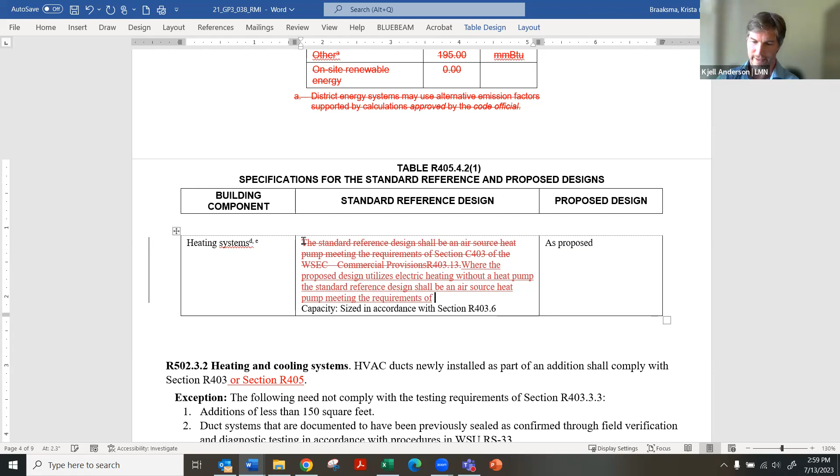Standard reference design. To use the 2018 language for the standard reference design.

Okay, we've talked about this a lot today, so I don't want to over discuss it this time because we've discussed this very thing already. But okay, is there a second for Gary's motion?

Okay, I'm not hearing a second. So the motion dies for lack of a second.

Unbelievable. I'll second. Okay, Andrea has seconded, so now we have a motion to amend, which is currently the motion on the table.

I wonder, the tag has talked about this issue before, so let's make sure our comments are new and in reference to the main motion and the amendatory motion's relationship to the main motion, because if things have changed, because now we're talking about proposal 38, then let's talk about that.

Okay, Gary, do you want to talk to your motion? No, it's pretty much there, and I know that we've debated this back and forth, so I'm perfectly fine if everybody else is to just go ahead and vote on this amendment. Like I said, I think we've debated it. I know that there's some hands up, but I'm fine with just going straight to a vote on this one.

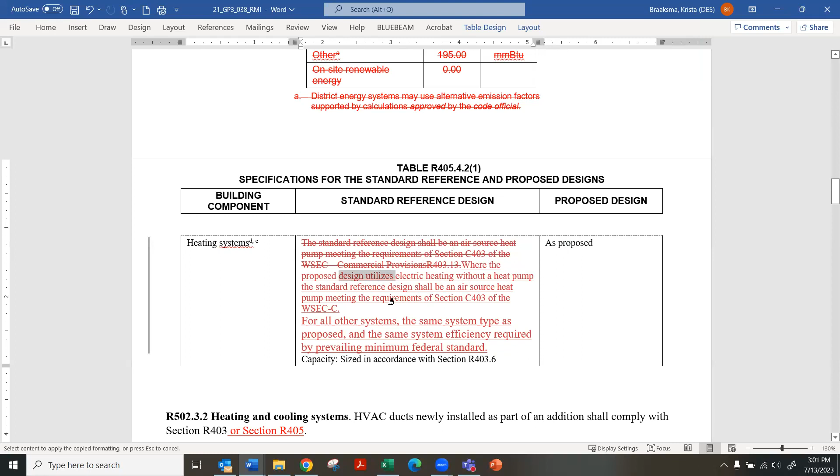Oh, okay. Yeah, I guess I would say regarding the amendment, I think that this possibly should be a change, maybe not, but I think that's exactly what David Reddy was suggesting, that we actually look at how things should be changed in the standard reference design and look at that in relation to the percent reduction targets that are in the compliance section. So I guess that's my thought. I want to consider this and other options, but I'd like to do it in relation to those targets and not do it now.

Okay, thanks, Poppy. Henry, you're up.

Yeah, just for clarity, if we are going this route, these code change proposals should be based off the 2021 as it was adopted. And that does include a heat pump water heater as the standard reference design for water heating. So if folks think we're going to reference the 2018, we need to clarify that here. It probably takes another section to revert back to 2018 language from 2021, if that's what folks are talking about. And once again, without beating a dead horse, this seems like we're just going like for like compliance here. So a gas house can achieve whatever 36% savings, and a heat pump house achieves 36% savings, but we're still stuck at the basic fundamental issue that the heat pump house still uses half the energy. But if you go through this route of modeling, we've lost that comparison that the rest of the code has been pretty strongly adopting for the last three code cycles. I might be misreading this wrong, but I just want to bring that up one last time.

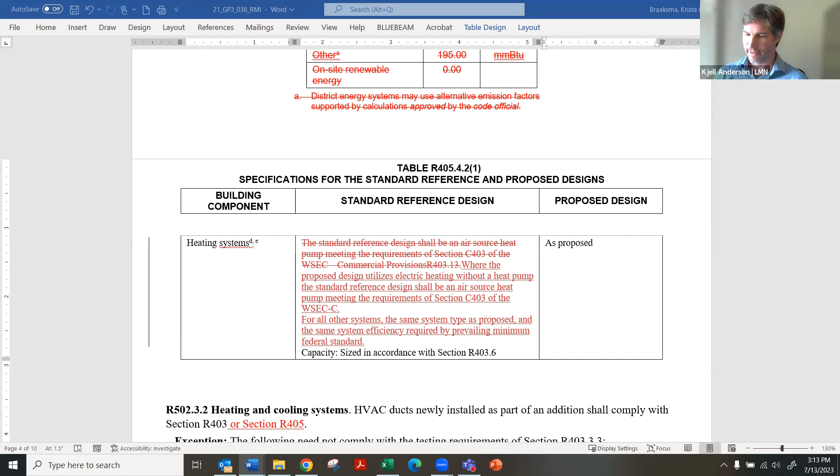I am willing to risk a voice vote on this, since I'm not seeing any hands up. The motion is to adopt, as I restated a second ago. All in favor of the motion, say aye. Aye. Aye. Aye.

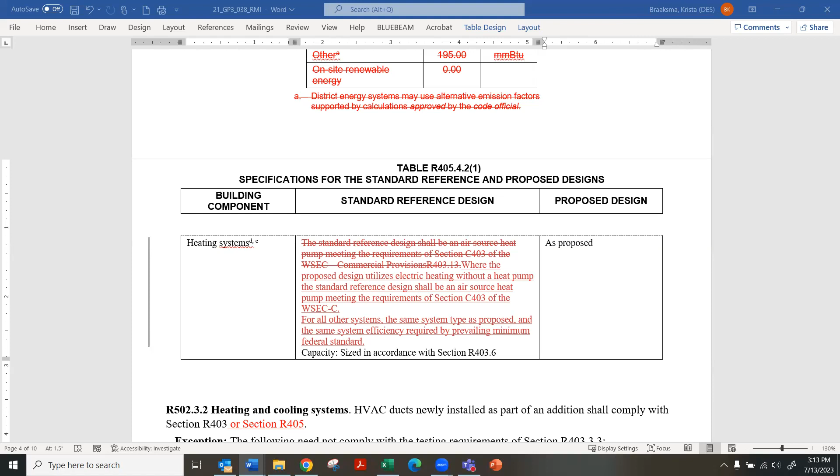Okay, those sections of 038 are moved forward. We are now discussing 039.

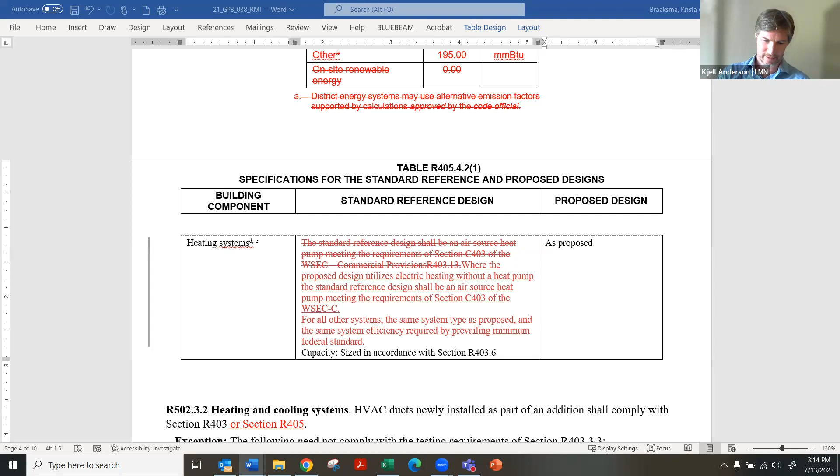Yeah, this is addressing some of the same areas we just talked about. There are two different views, site versus source, which we've discussed at length. The site-based view we just passed on Johnny's proposal is a valid view when you compare it to the federal standards, like Gary's amendment, which failed.

When you're trying to compare site-based energy without looking at federal standards, and comparing heat pumps versus gas, you're doing an apples to oranges comparison. So there's a problem, and you really need a source-based view if you're going to ignore the federal standards. I think we should look at this proposal in front of us as a parallel path, because the one just passed doesn't quite address the issues. It's close, but it doesn't quite address it. So this is attempting to look at a source-based instead of site-based path.

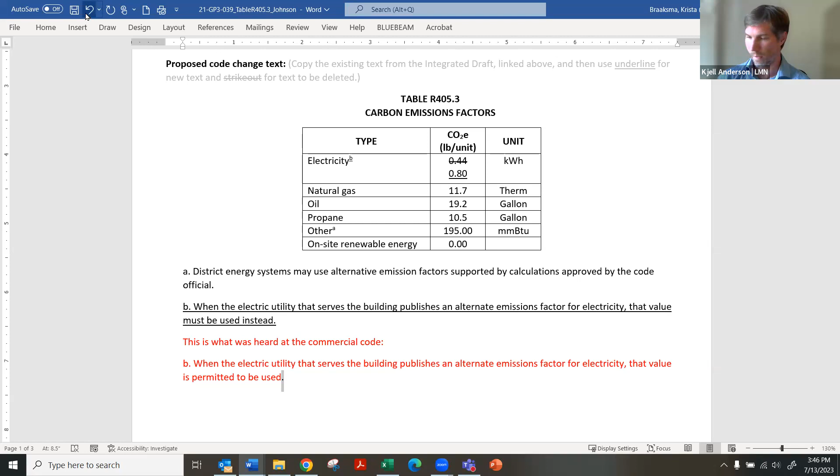Yeah, a lot of this is adjusting on the fly because we had a proposal that killed the whole emission factor table, and so we're trying to merge this. It makes it kind of hard to do on the fly. But if you want me to come up with language for the MVE committee, I'd be happy to do it - it'd be like a single sentence or so that references it. Yeah, you're more than welcome to do that kind of thing. We have 15 minutes left, 13 minutes left, and I don't think we could write that in 13 minutes and agree on it.

Okay, we have 13 minutes left. We could always extend this meeting because we're having so much fun. But let's keep our comments pithy and to the point. We do have one more proposal to consider after this, if we get there. Otherwise, the other proposal will probably just get kicked to the MVE committee to make a decision on, because I think reconvening the tag for a proposal and a half might not be the best use of all of our summers. Okay, so Andrea, you're next.

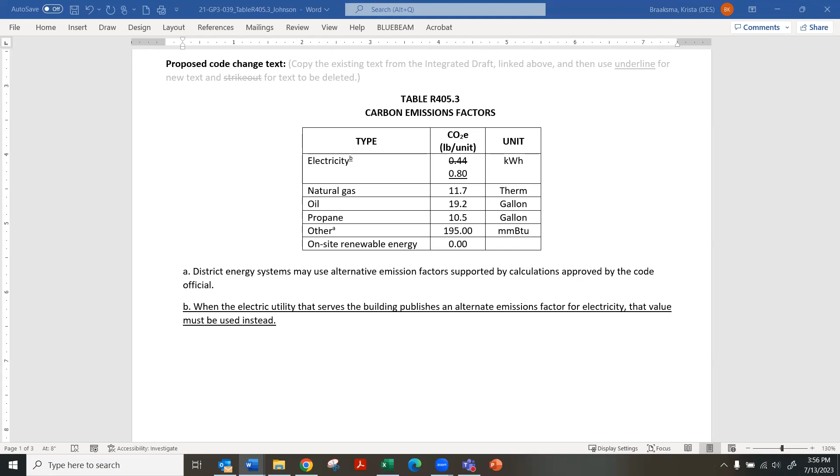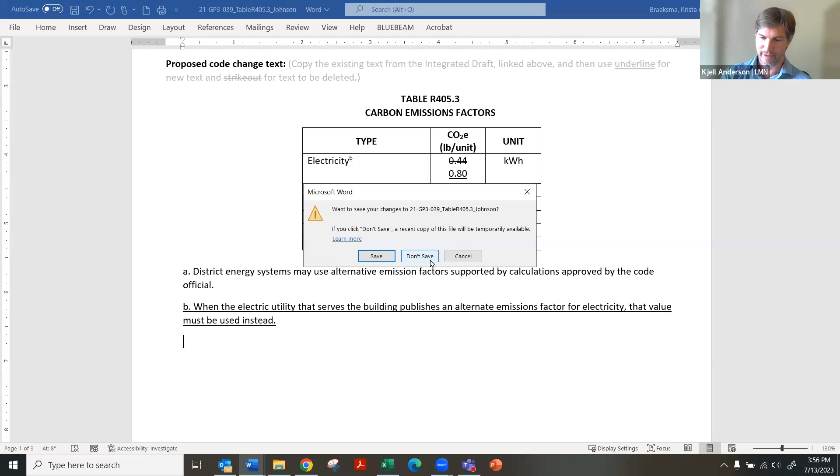Okay, motion carries. Exactly one more proposal, we have 4 minutes to consider it. My guess is we are not going to be able to finish consideration of it. So, does anybody have the heart to extend the meeting or kick it to the MVE committee? I don't want to convene the tag just to consider this one proposal. So if anybody wants to extend the meeting, I will entertain a motion to do that. Otherwise, we are going to kick it.

Albert makes a motion to extend the meeting and finish the work of the day. And that extension is for how many minutes? 30? How about 15? How about 15? I accept the friendly amendment. Okay, then I second that. Okay, we have a motion to extend the meeting by 15 minutes.

I am going to take a voice vote on this. All in favor, say aye. Aye. Aye. Any opposed, say nay. Nay. I heard one nay, that's Andrea. It's only because I can't stay past 4. Yeah, I'm really sorry that anybody has to stay past 4, including myself.

Okay, meeting is extended. Without further ado, let's consider proposal 15, which is the most exciting yet. No, I just said that to try and make you want to stay. All right, so proposal 15, we had just a tiny bit of history.

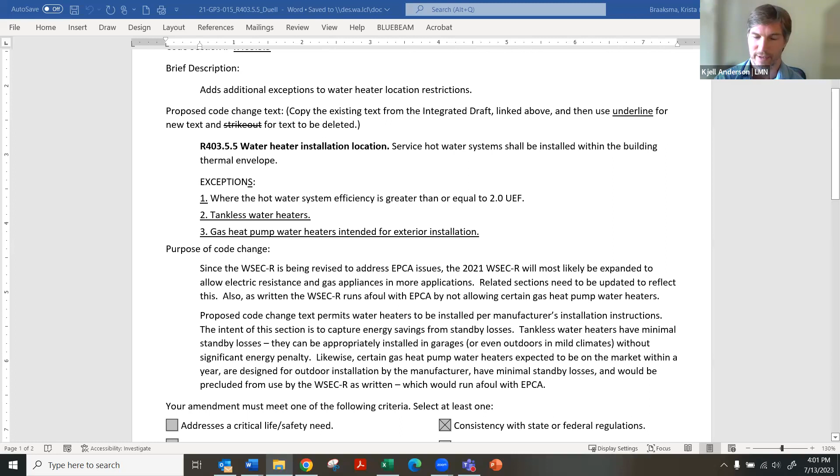Thank you, Jill. So have we now changed it in order for striving for EPCA compliance to allow federal minimum water heaters? Yes, my understanding is we passed a prescriptive thing, we've also passed a performance thing, and both of them, to the best of my understanding, allow federal minimum efficiency tankless or federal minimum efficiency gas appliances. Okay, and the reason I asked that, I haven't dug into it, but I presume that the federal minimum efficiency water heaters still include naturally aspirating water heaters. And if that's the case, we need to address that. We do not want to put naturally aspirating gas water heaters inside conditioned space. So perhaps this motion needs to be amended if that's the case. Hopefully some other folks will jump in on that, perhaps Dave or Henry.

Do we allow naturally aspirated water heaters?

Well, if that's the federal minimum, I know they're still out there. You can go to Home Depot and buy one tomorrow. So 0.62 water heater is minimum, and it's naturally aspirated. So these are vented naturally aspirated.

Yes, correct. We sort of do. Really hard to do these days, but yes, we do. So the concern is this is a serious health concern if we're putting naturally aspirated water heaters and requiring them to be in conditioned space.

Unless we want to fill homes with carbon monoxide. Allow other people to speak. Isn't that already covered in the mechanical code? You can't put naturally vented next to bedrooms and stuff.

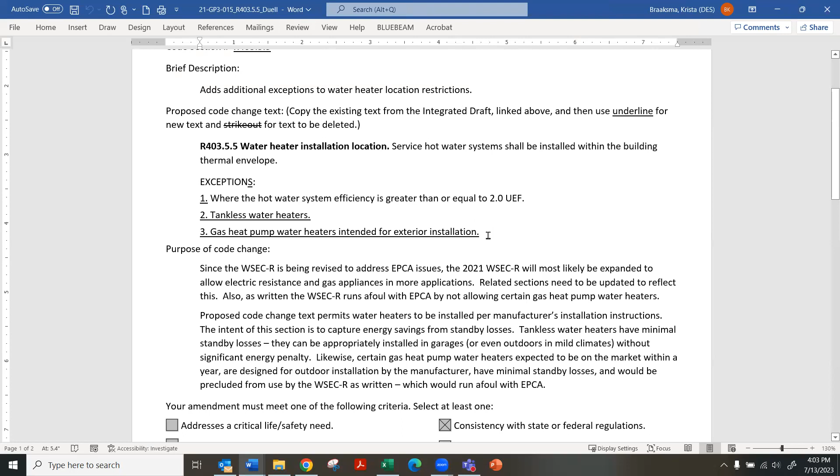Can I simplify this by offering an amendment? Add number 4: naturally aspirating gas fueled water heaters. Proper term is atmospheric vent. Is that true? Perhaps, I don't know. We've always called them naturally aspirating.

I would change that to vented. Vented, yes. So I offer that as an amendment, if there's a second. Is that the language that you want? Yes, Damon? Yes, thank you, Krista. Okay. I'll second it.

Okay, and the person who made the original motion was Gary? Yes. Okay, so if you and Damon agree on it, then there needs to be nothing else about it. So that's part of the motion now.

David, ready? I think if I recall, when this was reviewed by the TAG previously, it was in the context of you would now be required to use a heat pump for domestic water heating, and moving it into the thermal envelope in combination with using a heat pump for space heating made sense.

I guess I'm questioning whether this whole provision even makes any sense. I mean, we could keep adding exceptions. There's other exceptions where I think the UEF one covers the split heat pump situation, but it kind of indirectly addresses it. And what we're really focused on is the storage tank.

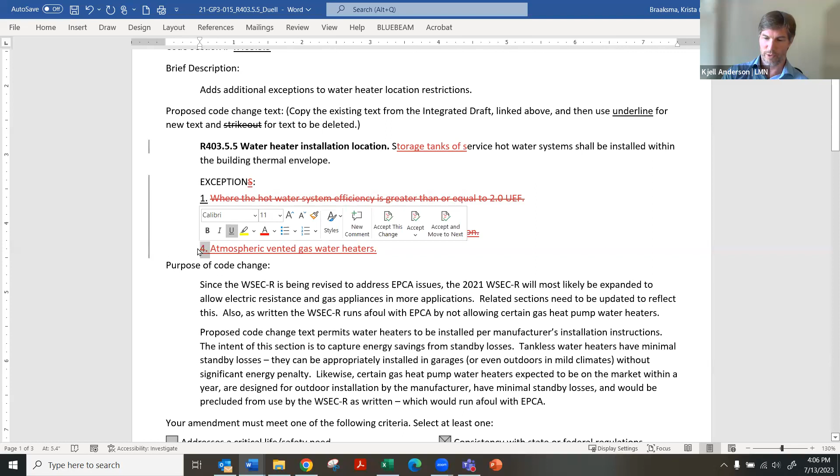Or do you need time? No, I prefer the way it was written originally. And the exception number 1 that we passed previously, I would like that to remain as well.

The CO danger with atmospheric vented water heaters is huge. The deal with heat pump water heaters in conditioned space, if they're not properly vented, is doing a disservice in a heating dominated climate like ours. It's stripping heat from the house, taking heat from the house to heat the water. So you're in a vicious circle where you're heating the house and taking the heat away.

So since most of those are beyond 2.0 UEF, having them in semi-conditioned space like a garage makes a lot of sense. So, if we take all that out, then we've gone the wrong direction. Okay, so it's not accepted by the seconder of the initial motion. David, Ready, if you want to make a motion, we'll look for a second on it, and it'll be an amendatory motion to do what you suggested.

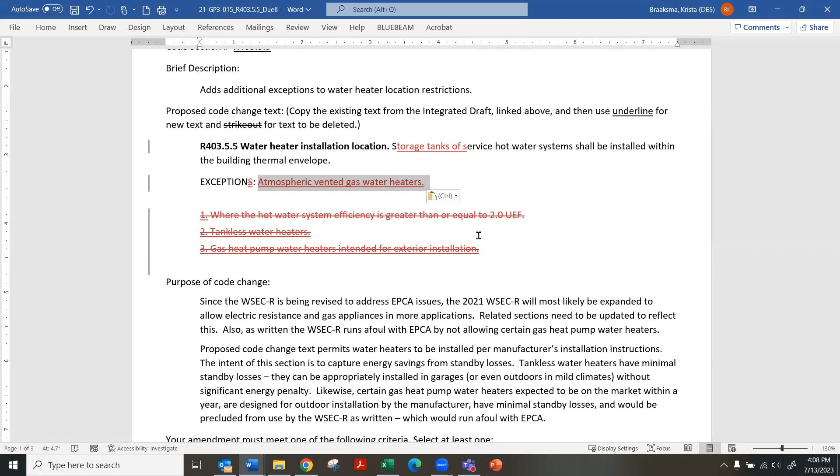David, ready, I guess, if you wanted. Yeah, I'm not gonna make a motion. I think we can make it work the other way.

Yep, okay. All right, we're to Dave Baylon. Yeah, I guess my comment after all this is mostly harmless. We should just go ahead and pass it.

Kevin: Might not be relevant, but it seems like the only thing left is electric resistance water heaters. There are no heat pump water heaters at the UEF less than 2, I don't think, on the market. So maybe this could be vastly simplified, but whatever.

Okay, Larry. You there? Am I there? Yep, I hear you. Okay. I want to call about

natural draft water heaters. That's what the industry uses. If you go to the International Fuel Gas Code or the National Fuel Gas Code, you can easily put these in a house if you follow the instructions to the letter for the venting. And that's what the inspection is supposed to do. We use a lot of natural gas water heaters over here, okay? Naturally vented. And there is no terrible thing if you follow the rules like you're supposed to, like has been stated. We've been doing it for a lot of years, and even in the tight homes.

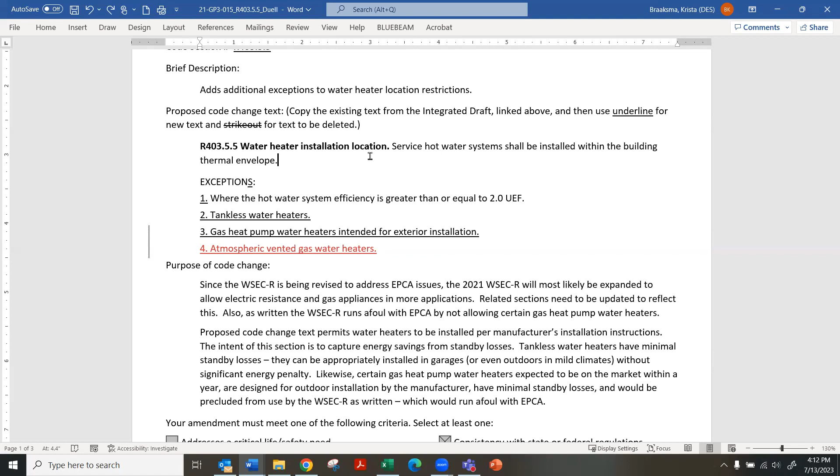I think Damon's points are well taken. Houses are getting tighter, and in the winter, in either side of the mountains, it's not very difficult to depressurize a house and bring in that CO that he's mentioning.

Thanks. Okay. Well, I'm going to risk a voice vote on this to save a minute or two. So we have a motion to approve what's on the screen, proposal 15, with an additional exception that was suggested today. All in favor of approving this, say aye. Aye. Aye. Aye. Any opposed, say nay.

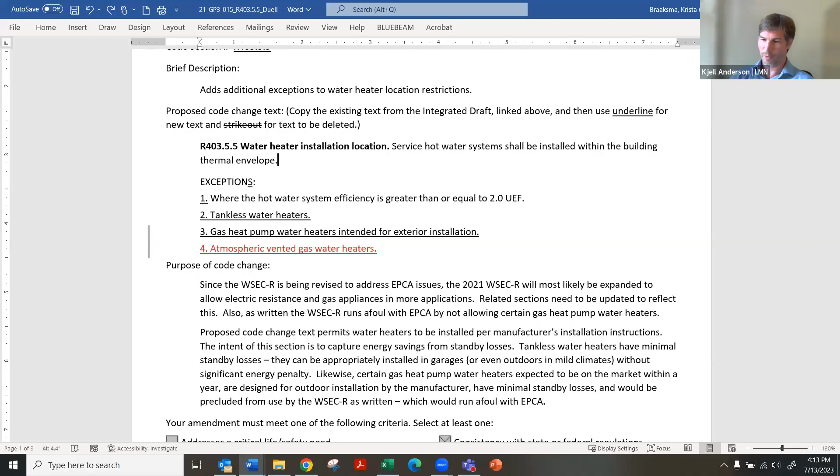Okay, and with that, thank you so much for the marathon session. We got through every single proposal that was made, and we have sent packages on to the MVE committee, and things will happen there as well. So for a couple of you that hoped for slightly different things, you are more than welcome. You're encouraged to suggest something to the MVE committee, and you can send it to Krista for language, or you can show up to MVE committee. But ideally, if it's code language you're proposing, you send it in advance so people can look at it before that meeting. Thank you so much for being here all day, and we are adjourned.

Thanks, everybody. Thanks, yeah. Jill. Thanks, everyone, for all your work. Good job, Jill. Good job, Kjell, bringing it in under the 15-minute wire. Great job. Yes. Yeah, Kjell, thanks for that today. A lot of work done.